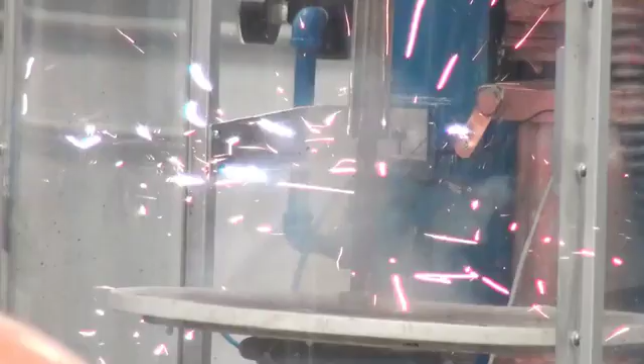Everybody coming out. The purpose of this meeting is to show you a new extraordinary source of power, and to put it in perspective, it's a power source greater than anything controllable that I'm aware of on the planet. I know it's a big statement.

So you might ask, well, what would that look like? Extraordinary, more powerful, say a million times more powerful than an internal combustion engine. What would that look like? Well, it would be pretty loud, and it would be explosive, because power is energy over time. Energy is heat, light, and other projectile kinetic energy.

So what we're going to show you is a demonstration, and we're going to do a scaled down version, and we're going to show you two different forms of fuels that produce plasma. Plasma is the state of matter, such as in the fluorescent lights in this room. It's ions, which are electrically conducting. It's a gaseous state, and remarkably, it's created from metal.

So you're looking at metal that's been basically transformed into an ionized conducting gas because of the enormous amount of power that's released in this reaction. The reaction runs for a very, very short period of time. If it ran continuously, we wouldn't be able to stay in this room.

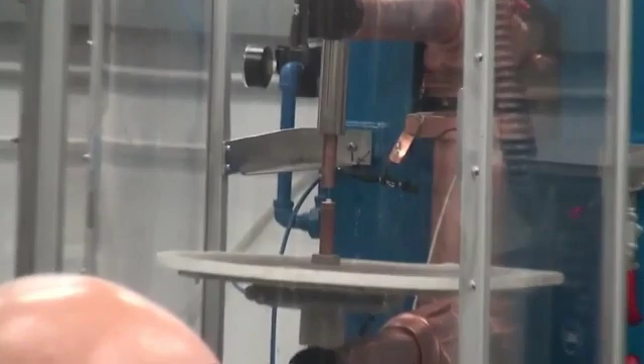Alright, let's set off another one.

Basically what it is, almost all water. There's two layers of metal - there's a cup and a cap, and the cap's pushed in almost to the bottom of the cup. In between there is a very thin microscopic layer of copper metal and water. So it's almost essentially nothing but a little tiny bit of water.

So this is what we're getting.

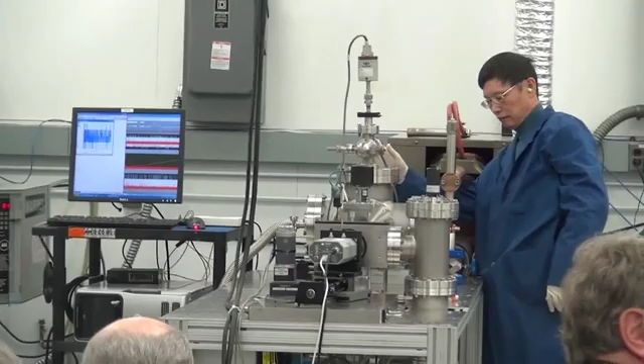This is model number 1341, again a standard commercial instrument, all new equipment. So he has another spot welder that will pass current through the rods. You can see there's two connectors and electrodes going into this water bath calorimeter, and in there is one of the copper systems.

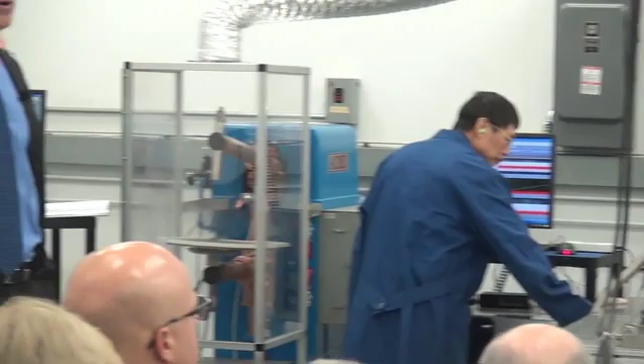It's copper metal, copper oxide, to help absorb the water and make it more dispersed, because we lose a lot of current on those smaller diameter rods due to the fact that inside that water chamber we have submersed a cell that's filled with helium and has the electrodes and contains the sample. I have to say that the detonations you saw have no theoretical energy possible - what that means is what you observed is not possible by any known conventional reaction. So that energy is being released by something entirely new, and it's entirely dependent on water being present and the high current being passed through it.

So now we're going to measure the thermal energy from one of these fuels. We put it in helium, so it's an inert atmosphere, and the helium helps transfer the heat from the ignited fuel to the water, and helps that coupling progress more favorably, so we get capture of that thermal energy released in the fuel in that water - we get a very accurate reading. We can't detonate it as well in these systems, but we still get a very substantial amount of energy, because theoretically there would be no energy possible.

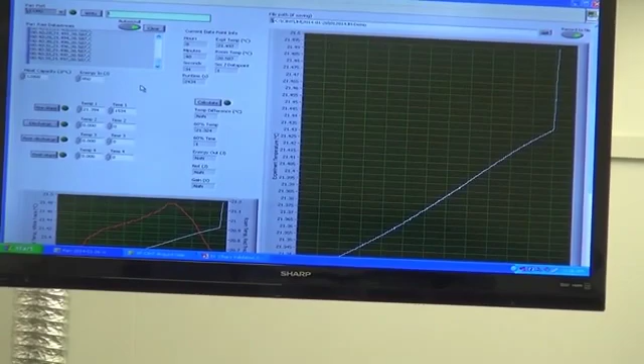So you let me know when you're ready to detonate. Okay, he's going to detonate his system. What he has is an extreme ultraviolet spectrometer. Why don't you go ahead and detonate, and I'll explain why you're doing it.

So he has another commercial spot welder, with two electrodes going into a solid fuel. It's in a vacuum chamber, so you don't have to use your earplugs now, because you can't make sound in vacuum. It's a very solid, thick walled chamber. That'll collect it. He just now exploded inside the chamber.

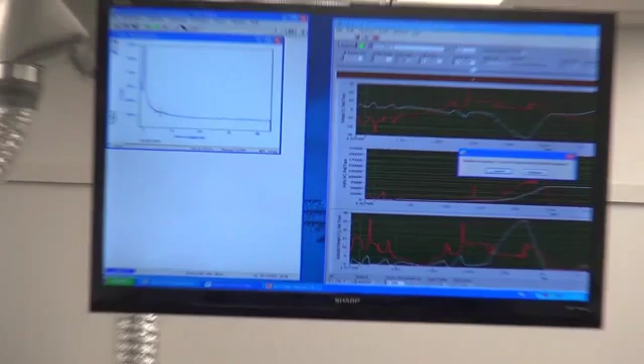The pressures in these detonations get very, very high. They can get well over 10,000 atmospheres, 10,000 times the pressure in this room. But we have a big expansion chamber there, and you can see that chamber where that blast expands and allows the light to come out.

This is a different kind of light than the light in this room that your eyes are responsive to. This is a light that won't even go through a centimeter of air. It's what they call extreme ultraviolet or soft X-ray. Now usually you think of high energy light as being very penetrating. Well, that's X-rays and nuclear kind of stuff, which is very bad and dangerous.

What we're doing is something that's very, very safe. This light can't even go through air, even a minuscule amount, so we have to have this system under vacuum. That light then travels to this unit on the end, called a spectrometer, and in there is something called a grating, which takes light and breaks it into its characteristic component frequencies.

Each frequency corresponds to a wavelength, or if you want to think of it in terms of visible, a color, and an energy. The light from that instrument will show that this is much higher energy than any known chemical reaction by about a factor of 100 times. And there's no alternative explanation, because there's no other source of energy, no high electric field that can create that extraordinarily high energy.

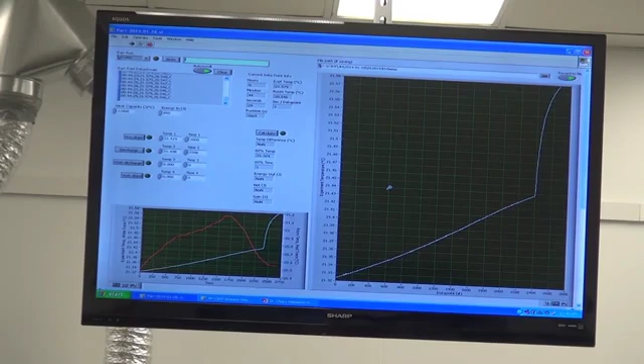Okay, we're just looking, and you can see the temperature is rising in that calorimeter. So the thermal energy is being transferred to that water as I'll be speaking here, and then we'll come back and get the reading on the energy that was released in that very, very minuscule amount of fuel.

So I want to talk a little bit about how minuscule that is. Typically what we get in these detonations, which we can measure by a number of different methods, is on the order of 1,000 joules.

Now, maybe this particular pellet we're going to set off here is probably going to be around 300 to 500 joules. That won't detonate completely. If we detonate completely, we typically get about 1,000 joules of energy from that amount of material you saw in the Jumpin' Johnny and the Cube crystal.

That is a lot of energy for a very, very small volume, because I'll tell you what it translates into. The volume in there is about 100,000th of a liter.

And you can see from the time scale of the trace that we were taking earlier when we detonated the pellets, the solid fuel materials, the time scale is about 1,000th of a second. Actually, munitions experts, people who work with explosives, said our time scale is much, much shorter than that. But we're just looking at the mechanical time scale when that system is disrupted by the pressure wave created by that ignition.

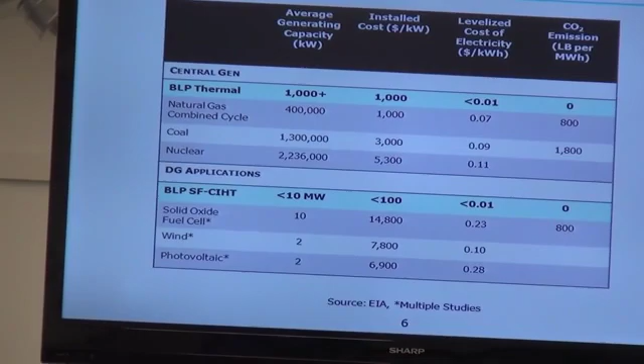And they would do it very, very cheaply. We anticipate the cost of electricity to actually be a very, very small fraction of a penny per kilowatt hour. There's no fuel cost. You use water that you can acquire freely from the humidity in the air. The systems projected, I can go through the systems, you can do the math yourself.

They should be extremely cheap. They should be about 1% the cost of conventional systems. Even if we're off by 10%, it's going to be extremely cheap. And I'll actually give you ballpark numbers as I go through the parts, so you can add it up. It's not going to cost very much for this equipment.

So the basic idea is that our modern society is based on F equals ma, electrodynamic equations, where you can actually calculate if you want to make a transmission line or transmit radio signals or whatever. There are certain equations you can actually use to predict exactly how things will work. Those are engineering equations based on classical physical laws.

Classical physical laws were abandoned because no one could really solve what the structure of the electron was. Everyone just said, well, let's just model the atomic system as a black box. We'll just assign a wave equation, which is like a probability type of model, and it'll just spit out numbers. We won't really have to understand what the position of the electron is or its energy. We'll just say it's everything at once simultaneously.

We take an average, and we can adjust the parameters to make it work how we want it to work. And we can continue to do that with more and more complicated systems by adding more and more adjustable parameters and more math. But there's no mechanics involved. There's no fundamental understanding of how it works. Therefore, it's not very predictive, which is kind of a limitation.

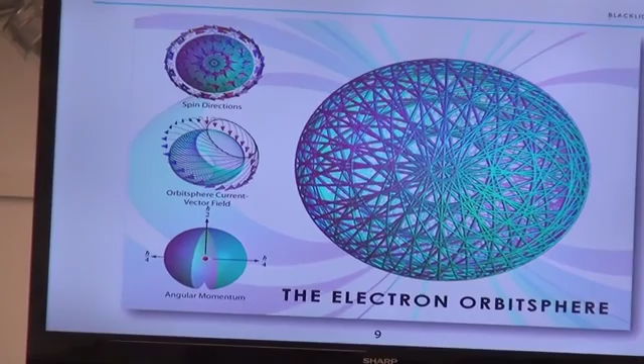So this is a computer-generated model of the electron. You can actually model the current the same way you model current in an antenna or some other physical problem. It's the same types of equations, and it works very elegantly, just as it does on the engineering scale.

Then you can solve things you couldn't even fathom solving with conventional theory. You can actually solve and build up molecules on a part-by-part basis. You know how to build a building? You don't say a building's a quantum wave function, you say a building is bricks and steel and parts. You solve the parts, and they go together, and you get something really complicated, but it's made up of little pieces that are much simpler.

So you can solve the individual units that make up molecules. Then you can quickly add those all up and get molecules of boundless complexity and boundless extent by adding those parts together. And guess what? The current theory says you can't do that. It works absolutely perfectly, again proving that the current theory is not correct.

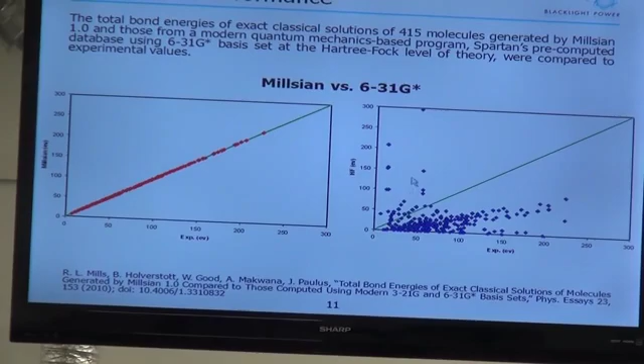How do we know that? Well, you can take 415 molecules and add the parts together. Here's the calculated and experimental data, and you can see it's a perfect line. The limits you can measure these experimentally. This is the current theory - it looks like a shotgun just sprayed across the screen. You'll see them point to maybe just one point on the line and say the theory works perfectly. But how about all the cases where it doesn't work perfectly? That's what really matters - it's got to work perfectly every time, and that shows you don't have the right theory.

The other thing that condemns the current theory and further disproves it is you can actually now image what molecules look like. The current theory says you can't really show a picture of an electron or molecule - the electron's everywhere at once simultaneously, it has no physical form, it cannot be defined. Well, guess what? You can absolutely image the electrons in molecules now.

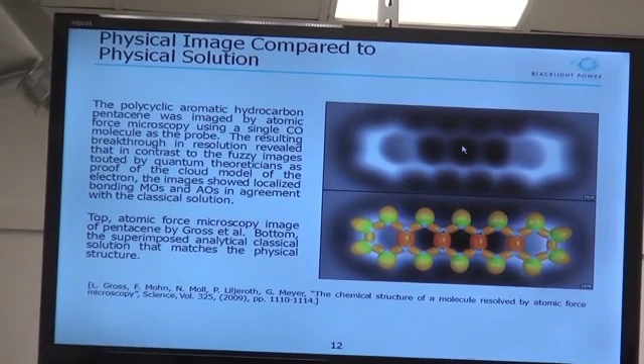This is a molecule called pentacene, and there's a technique called atomic force microscopy that's gotten more and more accurate. This is the solution using physical laws. You can see there's an atom here, and different bonds here, and it superposes very, very well. All the energies and parameters you can calculate with these physical laws match the limits you can measure. So, like you saw with the experimental evidence from the detonations, seeing is believing. A picture speaks 1,000 words. You can actually see molecules, and the solution has to match that picture, and our solutions do.

The quantum theory would say you can't make detonations from water. Water is the most known substance, and nothing out there that you can possibly fathom doesn't match their theory. Well, guess what? Their theory would say it wouldn't detonate, and you just saw it detonate.

We also have instrumentation on the end - now it's even more compelling. We can take a material, not even a fuel, but water itself, and detonate it initially with a high current that forms something called arc plasma. Once that forms, you get extraordinary high current through water itself, and it will make power.

You have that on the end, and then finally on the table on the far end, we have something called a differential scanning calorimeter, where we can make fuels pass high currents at power densities typical of what you get in a gas turbine - conventional realm, ours being unconventional. That's a commercial instrument, and we've shown it to many validators, validated at off-site facilities and many facilities, and some of those reports are on our webpage. So that commercial instrumentation is on the table there at the end.

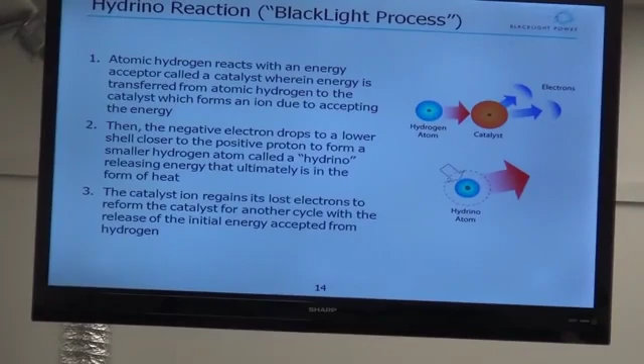So the way the Blacklight process works is you have a hydrogen atom that has a stable state and cannot emit radiation. But if you put that in proximity to something that can accept energy from the hydrogen atom in a discrete amount, that energy will flow to that acceptor, and the electrons will have to be ionized as a consequence of accepting that energy.

In our case, these particular electrons, or this step of the reaction, are limiting. So the reaction will propagate until that charge builds up. It does not take much charge to build up until the reaction becomes limiting. So we run a very, very high current through it, and that allows the reaction to propagate at very high kinetics. We then form an intermediate that you can see as the dotted dashed line.

The hydrogen atom has its initial radius, but it's transferred energy, so that's changed it to a different state, a different electronic state. It can't stay stable in that state. The electron drops down to a closer orbit around the proton, the positive binding center, and releases light in terms of a strong, very high energy light in the extreme ultraviolet that Dr. Ying is going to show you.

So you might say, well, what is the acceptor? Dr. Ying has the spectrum already. Looks like he's got a really nice spectrum there, done very, very well. So he's going to now set up to do another experiment to prove that that light is what you call extreme ultraviolet soft X-ray light.

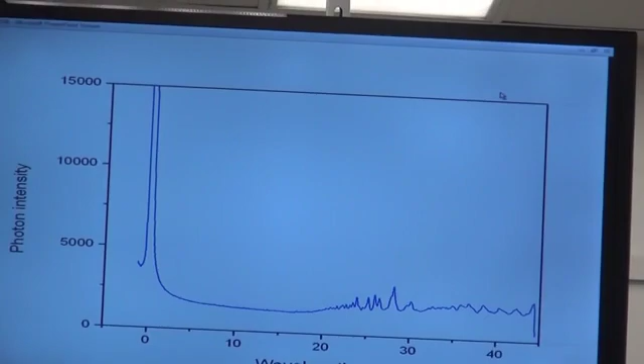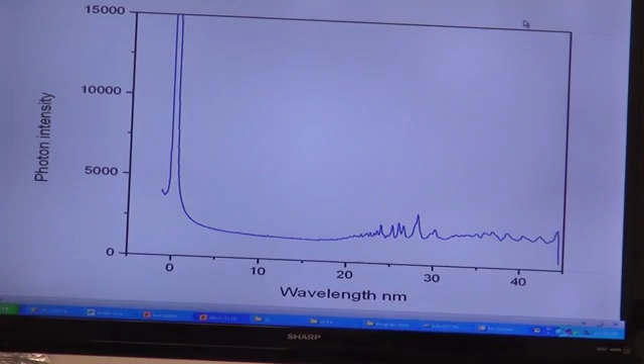Johnny's going to put that up there, and he's going to run another one with this filter that blocks that high energy light. So what you can see is, on the end here, there's a very, very high peak. What that does is integrate all this high energy light over all frequencies and shows it in one peak. In addition, you can see starting around 17 on this scale, 17 nanometers, that is very high energy.

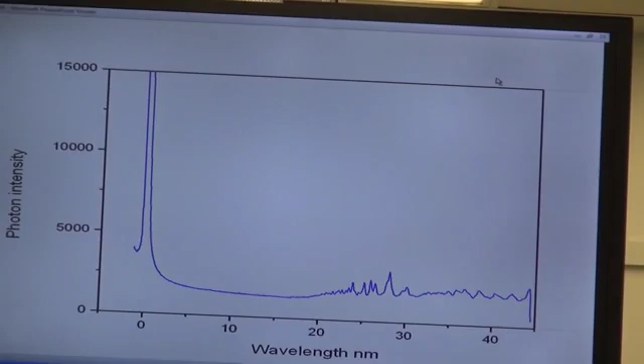When you ionize hydrogen, the energy or wavelength released from that is much, much weaker. That shows up at 91.2. That's the energy just to tear the electron away from ordinary hydrogen atom. So this is extremely, extremely high energy, even compared to that. Typical chemical reactions are even a very small fraction of the energy it takes to tear the electron completely away from the atom. So you can see that there's peaks here, starting around 17.

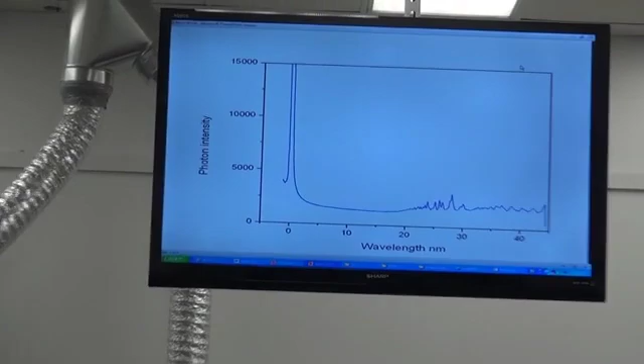And then there's a really big peak at what they call the zero order, which integrates all this high energy light. So he's going to come back and show you with another experiment that blocks that high energy light and proves, in fact, that this very, very high energy light is the nature of the emission.

So then you might want to ask, what exactly are the kinds of acceptors that make this reaction work? Well, again, there's a remarkable thing about water. The solution to water in terms of this classical theory is that you can have water accept energy in an exact packet of 3 times 27.2 electron volts. That number is a very special number.

That is the energy that the electron has relative to the proton in the uncatalyzed hydrogen state. So if you take a negative electron and positive proton, the energy between those two is 27.2. If you have something that accepts an integer amount of that energy, it can cause the hydrogen atom to go down to the lower state.

Water has an increment of three times that packet of energy. Not water like this - this is water that's hydrogen bonded, meaning all the water molecules are interacting. Otherwise it'd be a pure gaseous state, and even in a gaseous state like steam, water has molecules that are bound together.

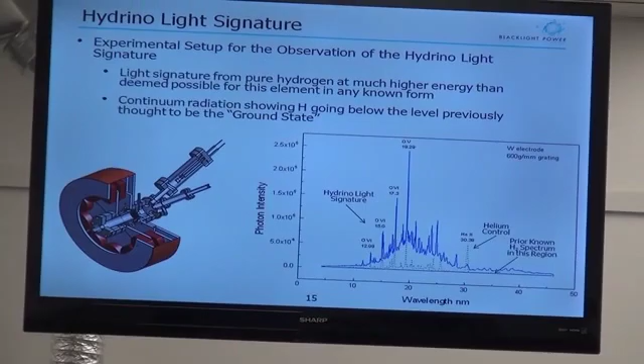So this is a spectrum we've gotten before, published in European Journal Physics D. Editors wrote a note about how major this was. And we got criticized that it could be due to some high fields. This is a discharge triggered by electron beam - it's high voltage. We did a lot of tests to show it couldn't be due to the high field, but our critics wouldn't accept that.

So now we have something that has no high field at all, and this absolutely proves our point that the radiation is coming from forming this new state of hydrogen. It's a very, very important development. So we show the energy, power, and the detonation, and we also show the characteristic signature of this new form of hydrogen that has no alternative explanation as the source of that energy.

So would you expect to see this in nature? Of course you would. What astrophysicists see is evidence that there's an enormous amount of gravity with no visible matter present. You can see a dark ring here - that is identified by astronomers as a ring of dark matter. How do you know there's matter there? Because you can see galaxies like these that are comprised of hydrogen. In fact, everything you can see is hydrogen for the most part.

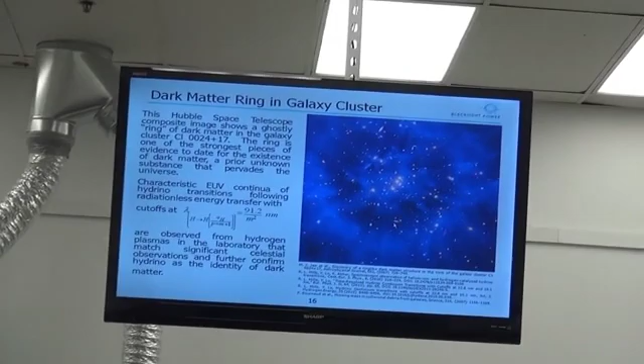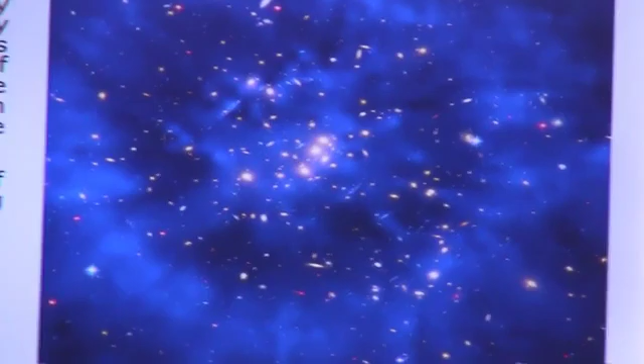But here, it's not really emitting relative to this background. And these galaxies have a very unusual structure for galaxies, and the reason why they have that appearance is because they're being gravitationally lensed from some other region in the universe. You can tell that by changing the angle of the telescope.

So this is absolutely seeing is believing - we're showing visually that you can detonate water. This is showing visually what dark matter looks like. It's a real thing, not something people thought about just in terms of theory. It's actually a physical phenomenon that you can observe, that there's mass that has gravity, but you can't see it visually.

And the reason is, once you form this new state of hydrogen, it cannot absorb or emit light. It's a different kind of reaction. Remember, we have a catalyst that accepts the energy, and then the electron drops to this lower state and releases continuum radiation. So it's different than a typical mechanism where electrons absorb in typical materials. So this hydrino is unique in that characteristic, that it's dark. But we can see it by other analytical techniques - we can show that it rotates, vibrates, has NMR, and other types of characteristics.

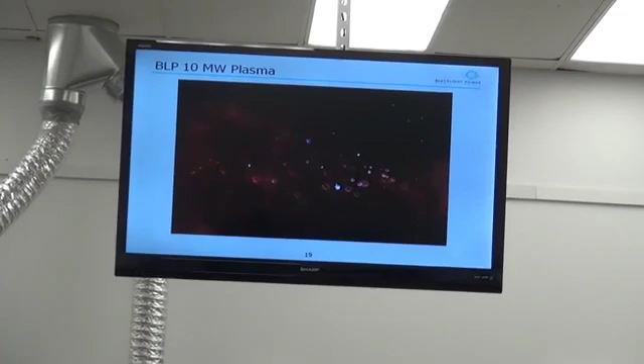What this is showing is that the solid fuel is becoming completely vaporized and completely ionized. It's expanding at supersonic velocities, meaning it's going faster than sound speed. That extraordinary high kinetic energy and highly ionized state is a flow of current, and that flow of current can go into a direct plasma-to-electric converter.

There are two types of plasma-to-electric converters that are common. One's called magnetohydrodynamic, and another one's called plasma dynamic, which we actually invented here at Blacklight. The magnetohydrodynamic relies on separation of charges in a magnetic field and captured into electrodes. The plasma dynamic is a similar type of process. I'll come back and show you more details of the magnetohydrodynamic.

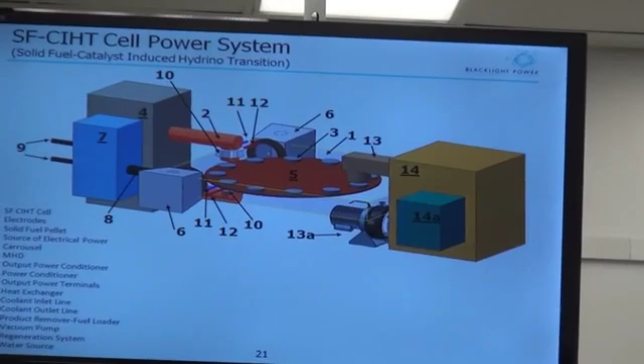Same principle applies like an engine. If you hear an engine firing very, very slowly, it's the same kind of idea. When it starts to get to very high RPMs, it almost sounds continuous.

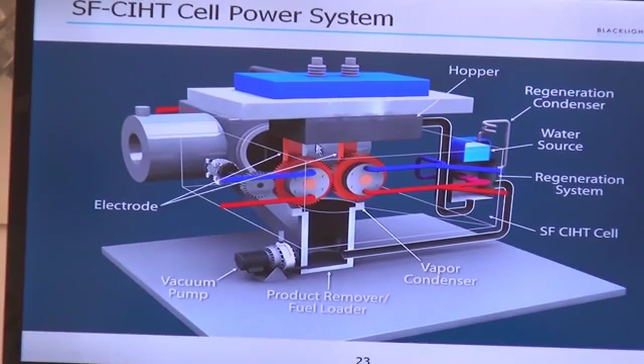So this is our basic system. It's 9 inches by 9 inches by 9 inches. It'd be a 10 million watt electric generator. It has different parts, all off-the-shelf technology that can be integrated as parts into this generator—no new technology. So it has a container that holds the fuel.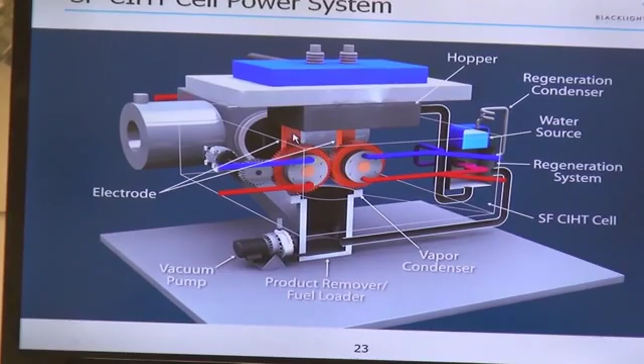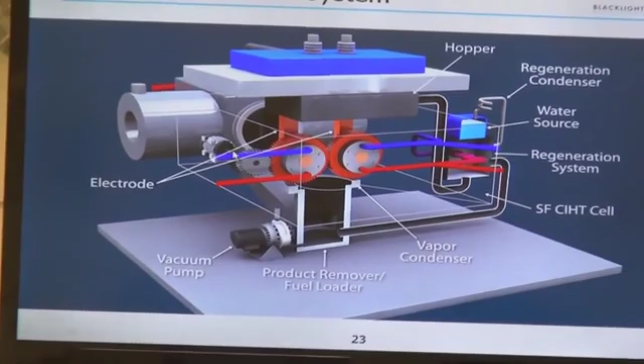As you see here, the electrodes—it has electrodes, and then on it a stationary hub. They heat sink these gears. These gears are driven by a drive gear and a drive gear motor. So the basic idea is you would have fuel flow down from this chamber that holds the fuel.

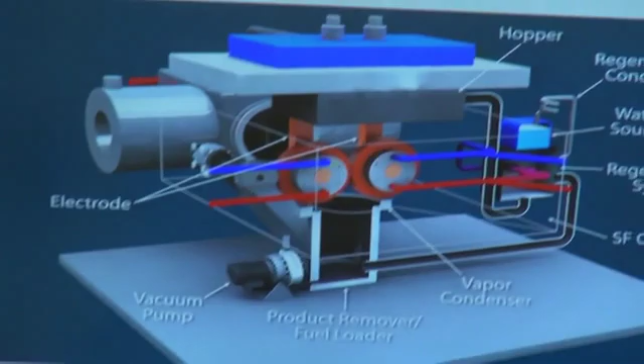So how big would the gear tube have to be, how many teeth, and how fast, to make 10 million watts? It turns out you have a 60-tooth gear going at 1,000 RPMs, the depth of the fuel was 2 millimeters, the base was 4, and the gear was half an inch, about a centimeter wide. That would give you 10 million watts.

So it's not very much. To give you an idea, 1,000 RPMs is really trivial. Formula One racers are limited to 18,000 RPMs for a 4-stroke engine, which is very, very complicated—valves, camshaft, crankshaft, 4-stroke, 4 different parts of the cycle. They're running at 18,000 RPMs. We're talking 1,000 RPMs just for turning gears. It's really, really mechanically trivial.

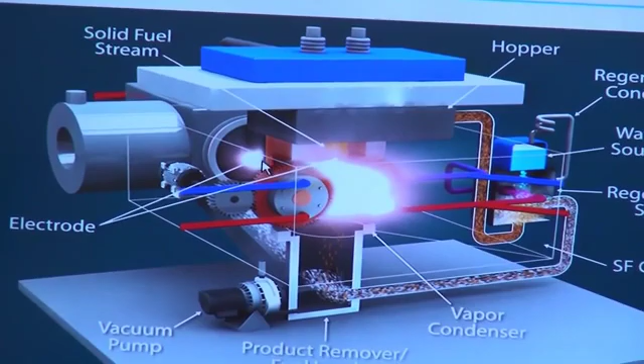So then we have a chute in the back here to collect the fuel. After the fuel fires, the plasma flows into this magnetohydrodynamic converter, which I'll explain. And then that fuel flows back to the chute, recollecting, and goes back into a circulating system like an auger, like they have in the pharmaceutical industry.

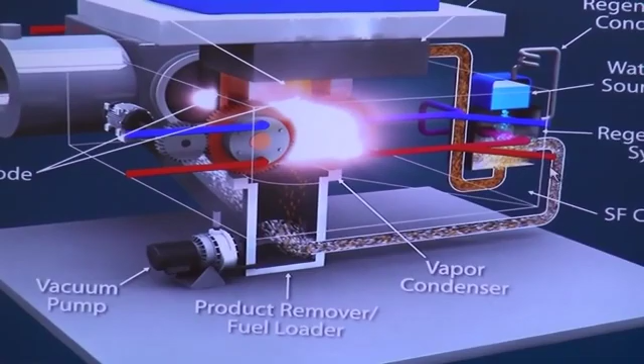It goes into another reservoir—you can see there's steam in here. Steam is formed by water falling on a hot heat exchanger. The heat is coming from this heat sump here, and it's being returned by this cold coolant line. So the water forms steam, the fired fuel comes in, gets rehydrated, and then goes back into the fuel reservoir, and then gravity feeds into the gears again. It's very, very simple.

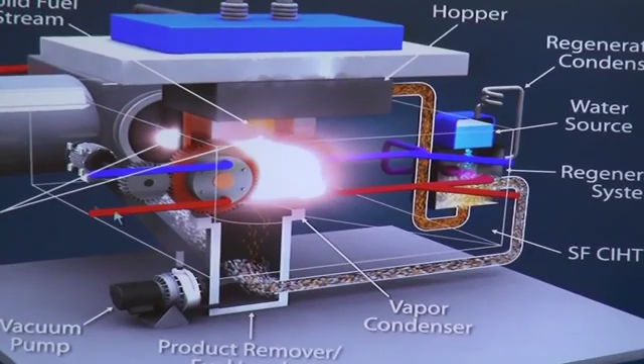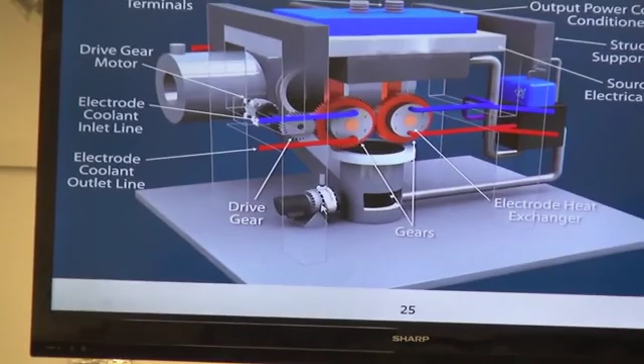These are magnets—I'll talk about the magnetohydrodynamic system in a second. There's a vacuum pump that pumps down this vacuum chamber. You can see the outline here in white of the vacuum chambers. It's all sealed up and runs under a vacuum.

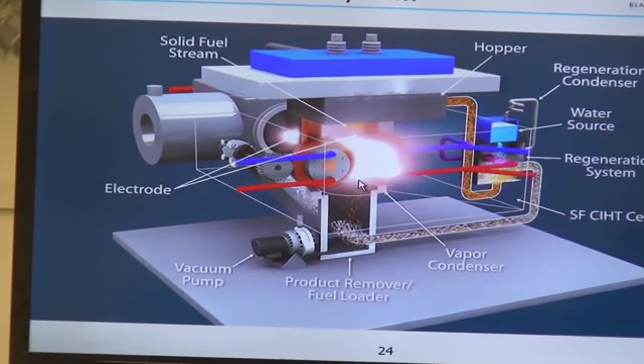These are magnets for the magnetohydrodynamic converter. This top plate, and then there's a symmetrical bottom plate on the bottom. That is the electrodes that collect the current in the magnetohydrodynamic converter.

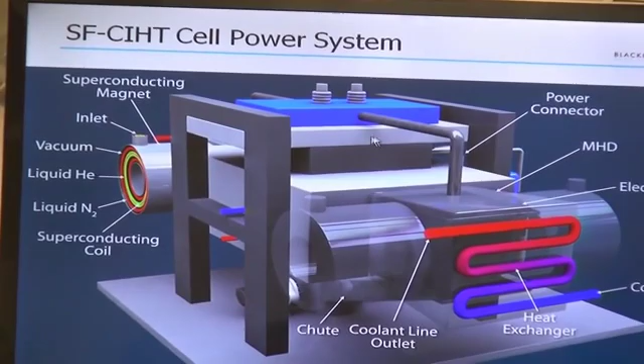We would use superconducting magnets. This is a power conditioner. This is a source of electricity for the electrodes. This is a power connector from the electrodes of the magnetohydrodynamic converter back to the power conditioner.

Magnetohydrodynamics puts out DC electricity, high current DC electricity. That's what we use for detonation or ignition of these pellets. High current DC, so a portion of the electrical output could run the system, so it can be completely autonomous of the grid and also autonomous of fuel's infrastructure. As I showed, it can be used for every conceivable application within the size range that you can make these units.

Randy, a quick question. How do you start that unit off-site? What kind of a battery starter?

Big DC or super capacitor, and then the power conditioner would have that as part of the system. So Sam brought up a point - this power supply is nothing more than capacitors. Basically, they're like a can of soda. They weigh about the same. You can store a lot of charge in it, and then it can act as a battery for very, very fast delivery of power, very, very high current. So that's what we would do - something that's very, very cheap.

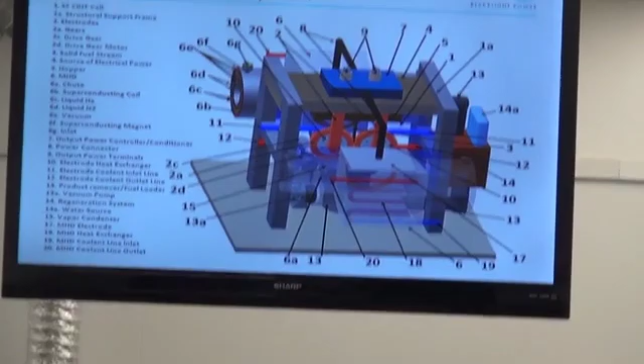So this is on our web page - we have the PowerPoint that actually has these slides and then the different parts. So we're looking for companies to partner up with Blacklight. We're already talking to a number of them now. We want to partner up to make parts.

They can make the electrodes, they can make gears, they can make the magnets, they can make the power controller, or they can source electricity for the electrodes, etc. So we will then work with different companies and assemble those components and make our generators. Our business model is to license original equipment manufacturers to make the units for Blacklight, and Blacklight would lease them to power users under power purchase agreements.

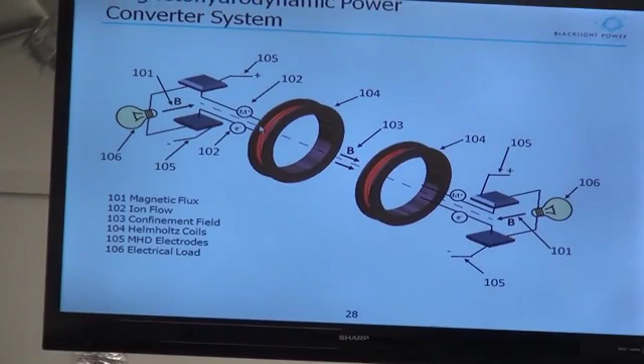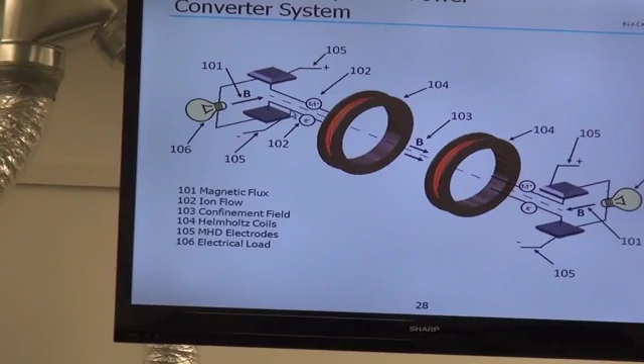So the way magnetohydrodynamic works is very simple. You have an expanding plasma, which you saw in that video. This power is a magnetic field that guides the plasma so it goes axially. It goes into a cross magnetic field so the plasma goes along this axis, and the positive ions are bent up and negative ions or electrons are bent down because of the force of a cross velocity in a magnetic field. So there's something called Lorentz force.

So you have a cross field with a flow of charged particles. It's deflected in a mutually perpendicular direction to both of those. So it goes to the top or bottom electrode depending on the charge. That gives you a voltage. Then you can pull power directly off that pole.

So what the magnetohydrodynamic converter is, it's a motionless generator. It's like a generator in a conventional power plant, but it has no moving parts. The current, or the moving part - the part that substitutes for the moving part - is the flow of plasma. In a conventional generator, you have to mechanically spin a wire. In this, the plasma is flowing - that's the conductor, like a wire, that's moving in that magnetic field and producing the electricity.

So this is really cheap. The power in the plasma is very high, so you can make this very, very compact. You make a very, very efficient generator, and again, it's very low cost on a per-watt basis. This one that is shown is an old one that's been around for a long time.

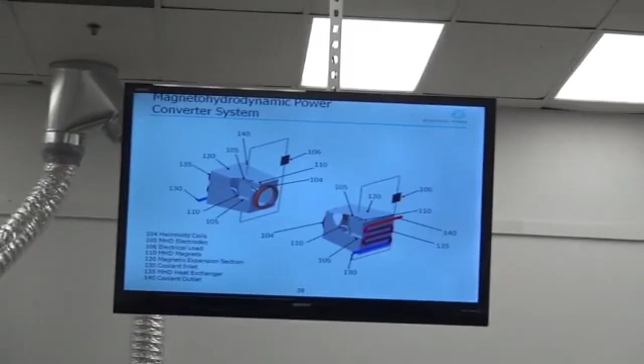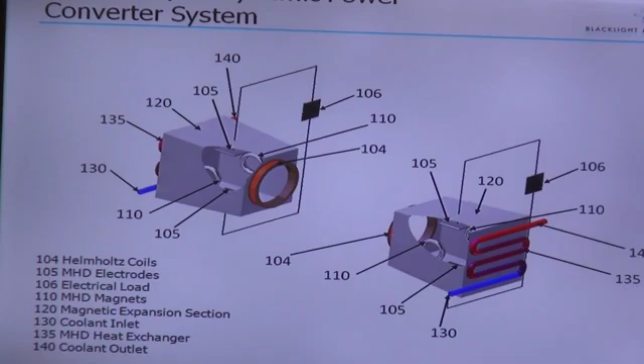You also have a heat exchanger on the back that would cool this device, because you're going to have some heat produced. We have heat transfer experts working on that. One of the advantages is we have very, very concentrated thermal energy, which makes it much more convenient to remove.

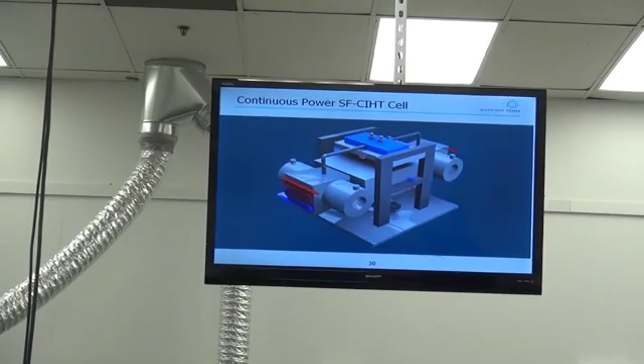So this is just an animation that goes through the workings of this schematic design of our engineered system and shows the different parts and how it works.

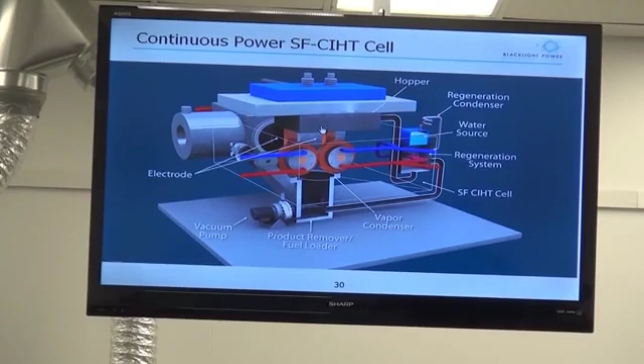So I said before, we have different components. There's off-the-shelf parts. One part contains the fuel, and the fuel drops down in these gears. You can see them spinning. You get the plasma forming, flying to the magnetohydrodynamic converter. Makes electricity. The fuel returns, gets rehydrated, goes back into the fuel chamber for another cycle.

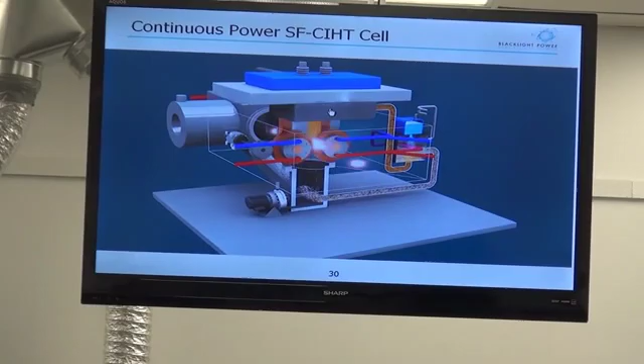We've taken the fuel and did ignition and analyzed it. The fuel is unchanged. It actually works better when you hydrate it, when you reuse the fuel, because that explosion and plasma expansion creates an extraordinarily fine powder with higher surface area than the starting material. But the material is unchanged. Only the water is consumed in that reaction. And we've shown that you can rehydrate it and use the fuel, and it'll actually work better in the recycling of the fuel.

Can you explain to us how the spent fuel, once it falls through the gears, how is it driven back to the steam unit? Like how is it pulled along?

Yeah, probably just to keep this moving. I'll take questions at the end, but just to answer that, the pharmaceutical industry has been doing that for many decades. Typically, to move the fine powders, pharmaceutical ingredients, they use augers. You can also electrostatically charge a belt, and use a belt conveyor with electrostatic charge. The photocopier and things like that use electrostatic sprayers. Pollution control equipment in terms of electrostatic precipitators can collect charges or charged particles, fine particles, and adhere them to surfaces very easily to either move them or otherwise manipulate them.

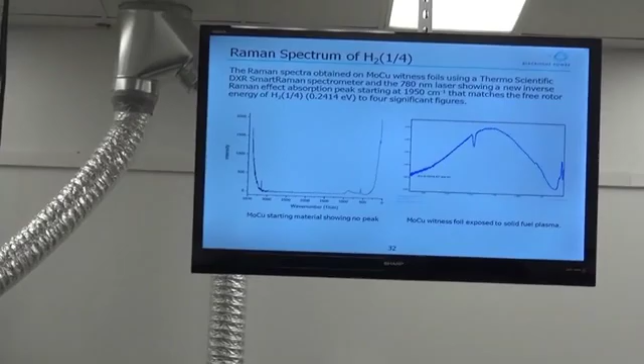That dip right there is identically at that peak - that's the gas we get off, and it shows that characteristic signature. There's nothing known in the system that can give any peak there, and that is the smoking gun that we're making hydrinos in this reaction. There are 12 types of analytical tests we do that are similar to that, which prove we made hydrinos.

So it turns out that magnetohydrodynamic conversion is an off-the-shelf technology. The Russians are still using it over in Moscow, and we're working on getting them to make us a magnetohydrodynamic converter since they have real expertise in it. There are groups in Japan that have large units as well, and the U.S. can also run large units, but it's kind of fallen out of favor.

Pretty much what people use now is gas turbines using fractured gas, what we call fracking of gas, and they burn natural gas and use the heated air to turn the turbine.

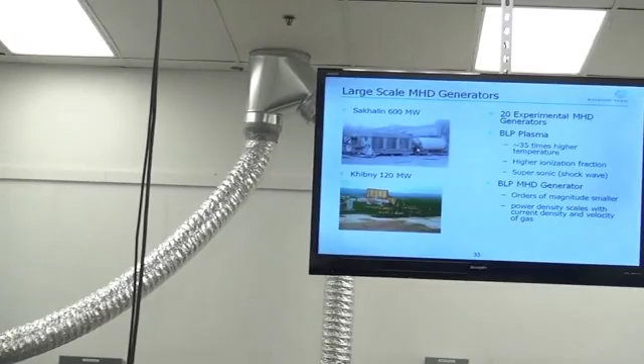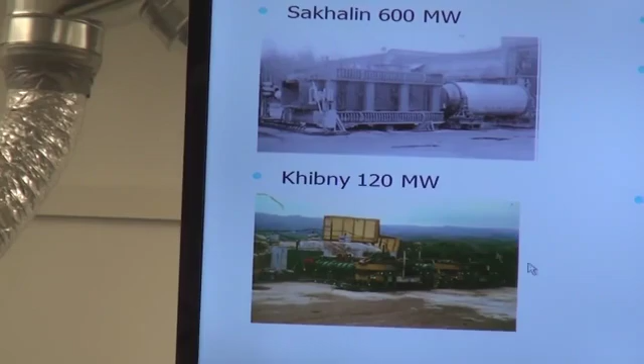So this is different. This has a combustion chamber. Here's a combustion chamber, and they burn coal in here, and then the coal fire would build up the pressure, because they're burning it at atmospheric pressure, just air going in there, so it gets heated, and you know what happens whenever you heat something in a confined space—it builds up pressure and wants to expand—so they have it shoot out this nozzle and into this 600 million watt magnetohydrodynamic converter.

Keep in mind, we're going to look at 10 million watts, so it'd be 60 times smaller, but our plasma is 10 million times more power per volume than a coal fire. That means we can make it a lot smaller because we have so much power in a small space. This coal system is big because you need to flow all that gas through there, and you can't get it to that extraordinarily high pressure. So ours is much more energetic and should be much smaller.

So the dimensions I showed you are the best calculations we have presently in terms of the relative scale of all the different parts on that 9 by 9 by 9 meter design.

Having something that's very small and very autonomous obviously has advantages and can serve a vast array of power applications. So when you're making billions of watts per liter, it's very, very compact.

The fuel is ubiquitous. Anywhere, even in desert, has a vapor pressure of water, and you can get water from the humidity in air with water-absorbing materials, or just put water into the system.

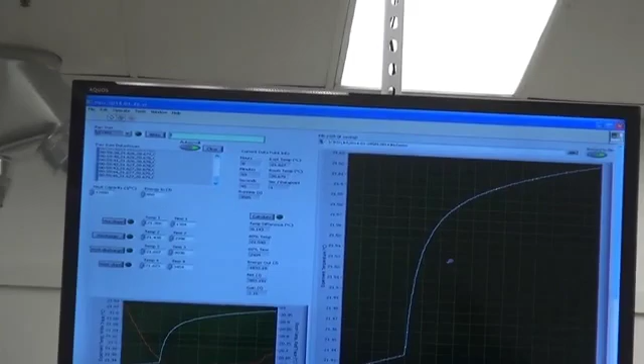Okay, so Dr. He has now put up the calorimetric trace for the calorimeter. You want to go over just what the units are and the numbers?

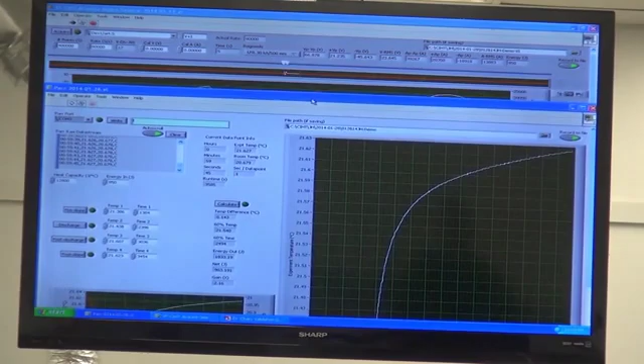And then right, okay, and then Dr. Hu is going to show his spectrum on the extreme ultraviolet. It's called a grazing incidence extreme ultraviolet spectrometer, made by McPherson, model 310—in case anybody has particulars they want to try in their own lab.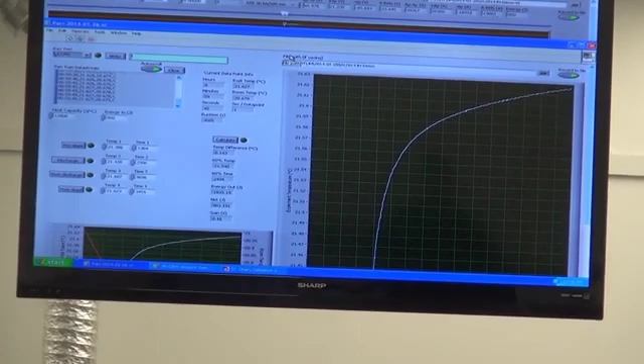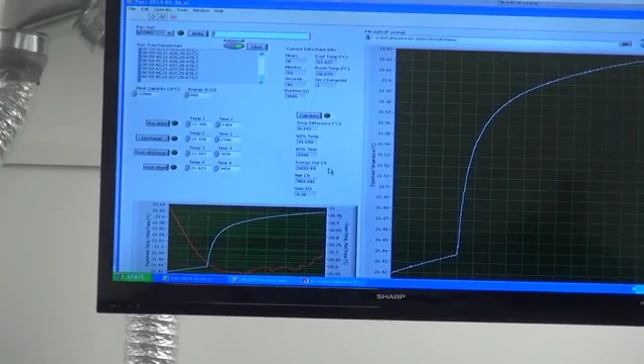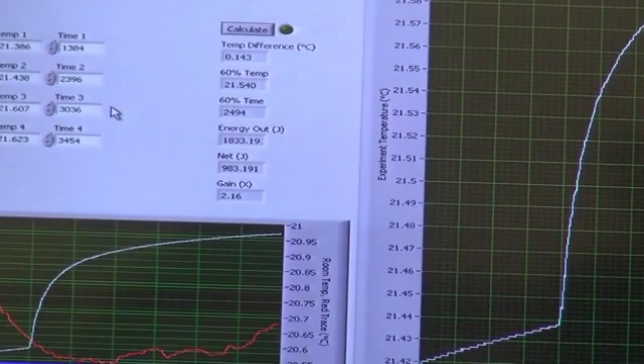So you're saying: before, 1 kilojoule, 1 millisecond, 1 megawatt, 10 to the minus 5 liters is 0.1 terawatts of power. And there it is, live, created here at Blacklight. So you've seen it for the first time: terawatt power densities per liter, controllable, and they can be converted to electricity.

So now Dr. Liu is going to go over his spectrum proving that the source of that power was in fact the formation of these new states of hydrogen that we call hydrino. It has a characteristic high energy light, higher than any possible emission of ordinary matter, and cannot be created by a high field or any other alternative explanation. There is no high field present.

The system is shown on the screen.

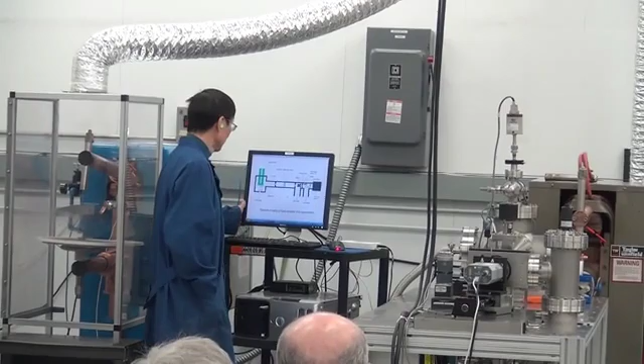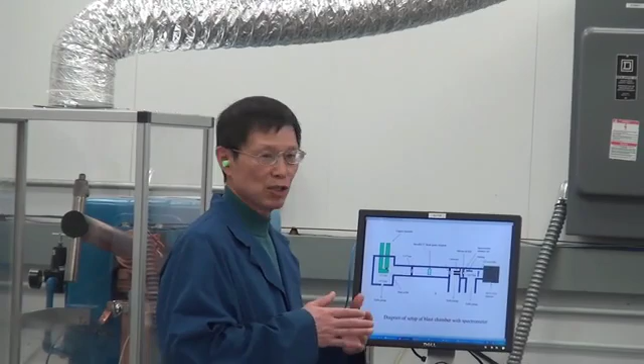The blast chamber has a certain volume so it won't make the pressure too high when it blasts. The UV light needs to pass through the gas to reach the detector. If the chamber is too small, the pressure is extremely higher, and the light cannot pass the dense gas, so the chamber has to be big.

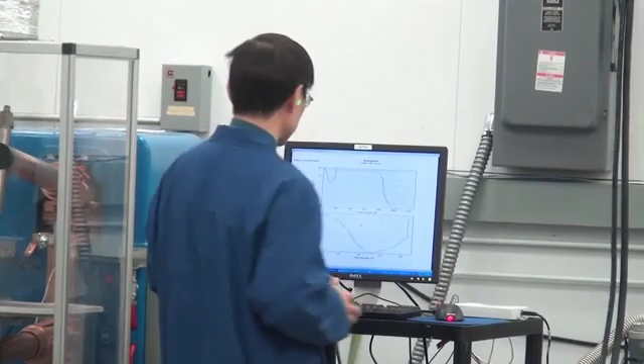On the path of this chamber, we have two aluminum filters. The aluminum filter is well known; it can block the visible light, and that is the diffusion curve of the aluminum filter. This is the transmission curve. Basically, it allows photons from 17 nanometers to 80 nanometers to pass. The visible is blocked, and some wavelengths below 17 will be blocked because of the notch of the efficiency.

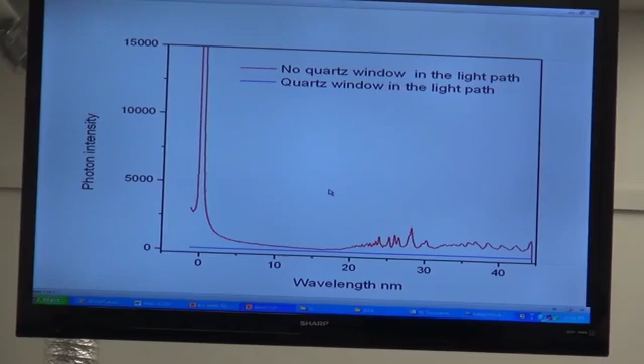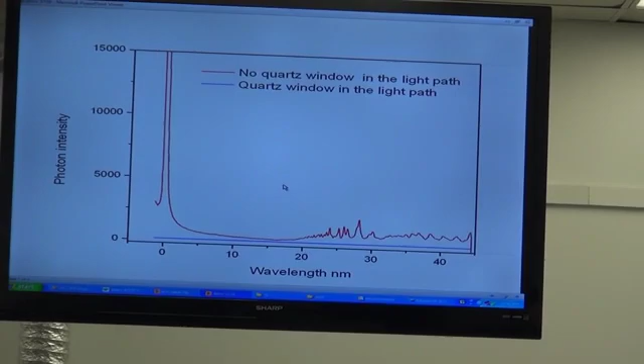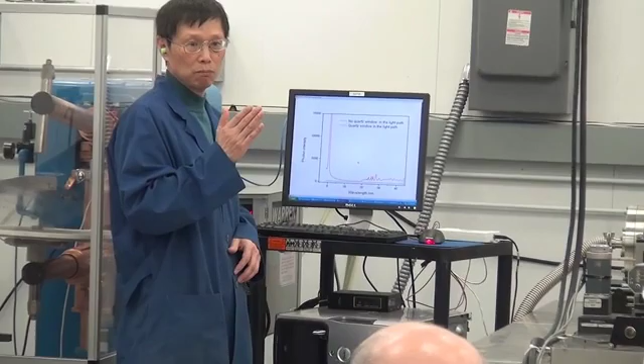The red line is the spectrum with the blast sample and with two filters on it and without a quartz window. Previously we had a quartz window set up in the system, so the quartz window can block the UV but let the visible light come through. So we have two spectra: one with the quartz window on, it's the blue line, nothing. So the quartz window blocks the UV while visible passes, but the aluminum filter blocks the visible. So the spectrum without the quartz window is EUV light.

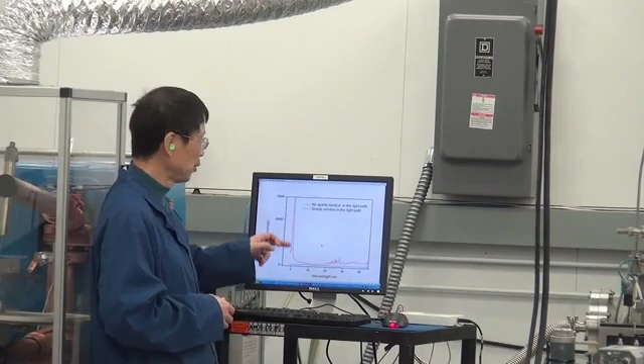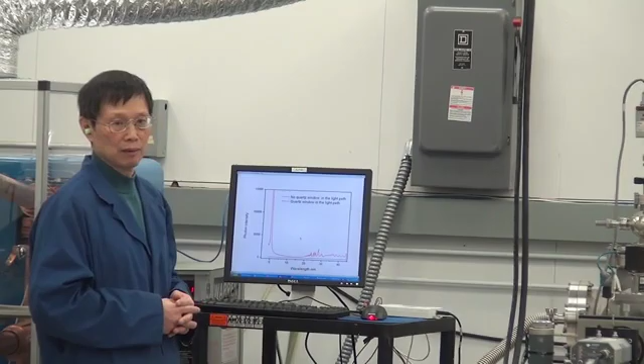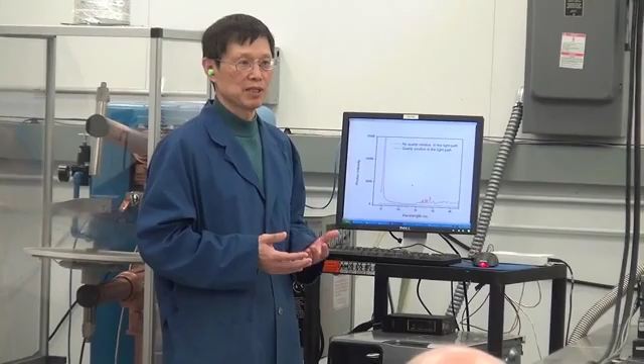So there's EUV light being emitted and power being generated, and we have a new source of power, systems to harness that power. We've also had four validation teams in so far, confirming the extreme ultraviolet light, confirming the plasma, the characteristics of those plasmas, the extraordinary energetics we're seeing, more so than known conventional high explosives. Again, this is not a high explosive.

This is only ignited when you throw current through it. It's limited to the very exact position where the current flows. It won't self-propagate like explosives, so it's got beautiful characteristics as a fuel, and extraordinary characteristics in terms of being a source of plasma for direct electrical conversion. Systems appear to be extremely inexpensive, and they use commodity chemicals. The capital cost is projected to be extremely small, about 1% that of conventional capital equipment, no fuel costs, completely autonomous.